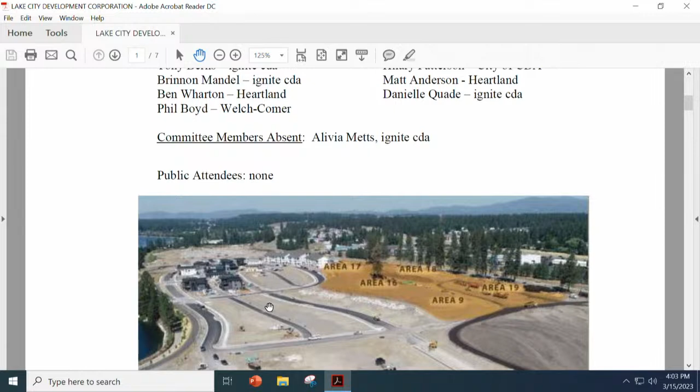So this team met to chat about these areas, and they are depicted on the screen. This is an aerial shot of where areas 9, 16, 17, 18, and 19 are located. This also is a graphic looking straight down on those areas.

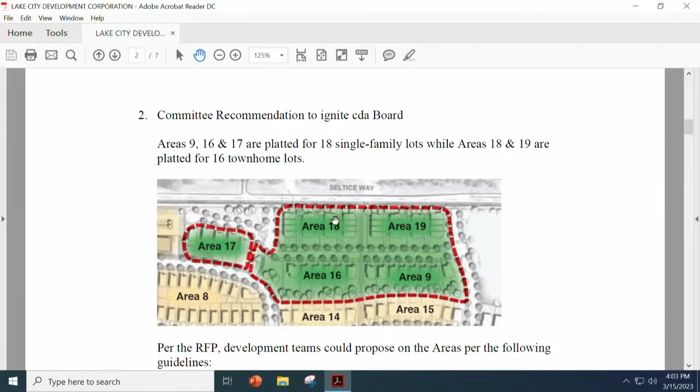Areas 9, 16, and 17 were designated for single-family detached residents, and for 18 and 19 we were looking for a preferred use of townhomes.

So just to give you a background on the proposal metrics, I'll read this: proposals must include all single-family areas 9, 16, and 17, or all townhome areas 18 and 19, or both types. Developers cannot propose on individual areas. Developers can propose alternate configurations or product types within the confines of the development standards, with higher density concepts preferred on areas 18 and 19. Any replatting would be required of the developer.

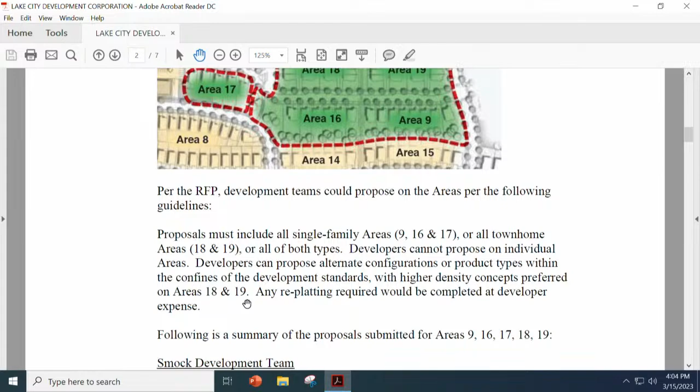So we had 3 proposals received. We had a proposal from the Smock development team. They bid on all areas contained in the RFP: areas 9, 16, and 17, they were looking at 18 single-family residents; areas 18 and 19, 10 twin homes. They bid on areas 9, 16, and 17 up to $2.7 million with escalation, and on areas 18 and 19 up to $1.9 million with escalation. Their base bid, though, was $3.37 million.

Toll Brothers also bid on all areas. They were going to put 16 single-family residents on areas 9, 16, and 17, and 40 townhomes on 18 and 19. Their base bid was $3.2 million.

We had a third development team submit, the Butler Stam development team. They bid only on areas 9 and 16 in the RFP. Their bid was $900,000 up to $1.4 million. This proposal was deemed non-compliant for the RFP requirements because they only bid on 2 of the areas and did not follow the requirements of the RFP, so the team did not consider this a compliant proposal.

We just want to show you a few of the graphics of the concept depictions that the Smock team provided, what their designs would look like. And we also received some representative concepts from the Toll Brothers development team, their townhomes, depicted there.

Using information from both the Smock and Toll Brothers development teams, mainly anticipated development timeframes, we ran a financial comparison to look at what these proposals offered the agency, including purchase price, additional Ignite CDA required site improvement costs, and estimated tax increment revenue projected over the life of the Atlas District. Credit to Phil Boyd and Welch Comer for this analysis. We looked at the product count they were going to provide and the phasing in time of completion in years, and weighed it into a financial analysis that looked at the tax increment yield over the life of the district.

We did this because of the issue in area 19 specifically, where there was quite a bit more density provided in the Toll proposal versus the Smock proposal, and we wanted to really look at a quantitative analysis of what that meant for the agency.

Looking at the different costs to the agency for additional earthwork, the analysis showed that the Toll proposal would yield the agency about $1.5 million more over time than the Smock proposal would. Given that, the team used a scoring matrix that we typically use to score these proposals, up to 200 points.

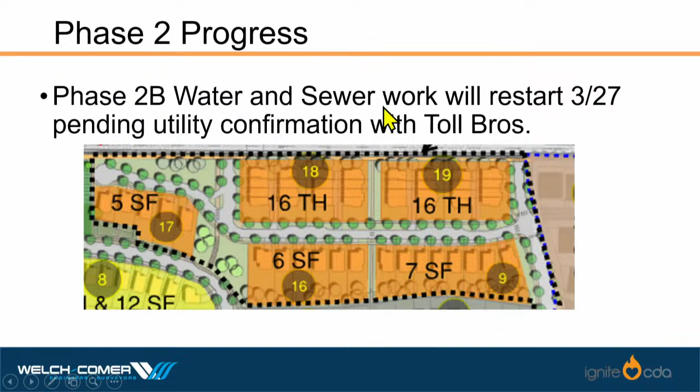Just some other progress work - if you were to go out there now, you'd see contractors working on a few things. One thing I haven't highlighted much is these little stormwater treatment systems, so I thought this was an opportunity to point it out. This is construction work at the end of Jammer Lane. These are called R tanks, and they have a special soil material on top called focal point. This is how it's shown in the plan.

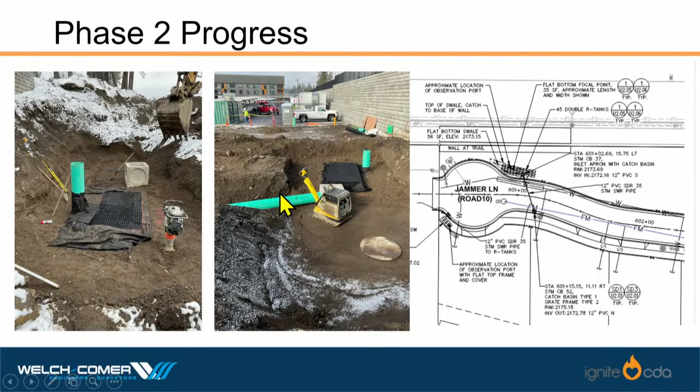The way they're constructed, you excavate a hole for these tanks. These R tanks essentially treat stormwater once it's moved through the soil, and allow you to more efficiently construct the surface component of stormwater management. What that means, if you're the master developer, is you have a certain amount of real estate. Traditionally in a lot of subdivisions, you'll see stormwater treatment on the side of the road in the form of wide swales - a depression with mowable grass where the stormwater goes.

When you have real estate that's relatively inexpensive compared to this land, which was very expensive - the city paid a very high price for it - when we did the financial feasibility study, we needed to figure out how to put a high enough density in there to generate revenue that would reimburse Ignite for its development costs, and the city potentially for their purchase costs. So to create that density, we needed all the land we could get.

Including where you would normally put stormwater treatment, we started pursuing this idea of using these R-tanks and focal point.

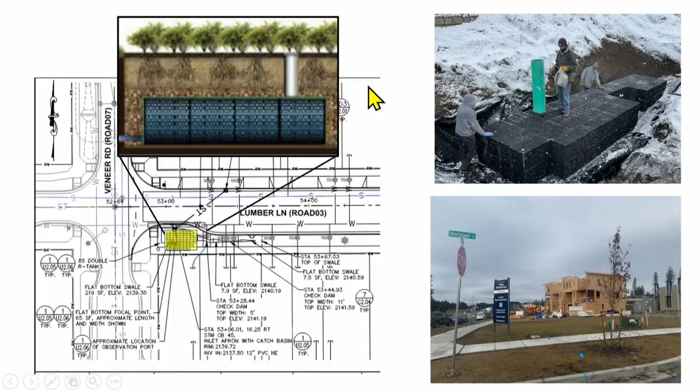As long as it doesn't have to be torn out in 10 years or something, it sounds like a good deal. What was the name of the tanks again? They're called R tanks. Just R tanks. Any other questions or comments?

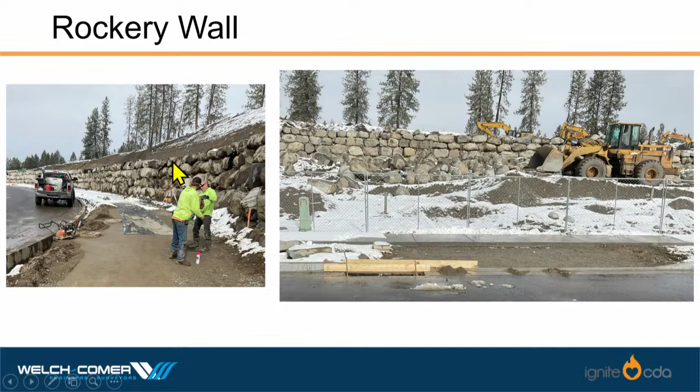Okay, just a couple other status reports. Our favorite rock wall is still underway, but should be finished by the end of the week. Coming along. Amen, it's just been a long haul to get it done.

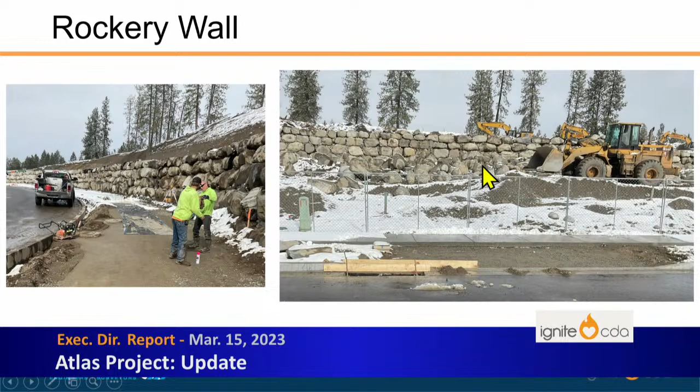If we really felt like we wanted it to be in the right-of-way, we could have gone to the city council and asked for an encroachment permit. I think it puts the city in a bit of a predicament when they allow perhaps Ignite to put a sign in the right-of-way for their development, but they might not let a private developer. So like Tony keeps telling us, we value good partnerships, and we wanted to be a good partner here, so we started evaluating another option.

Could we push it into Area 10? The sign is going to stay the same size, but some of the decorative fencing that was going on each side, we think we're going to pull off because it has a bit of a diminished value, I think.

I don't know that we're getting a ton of value out of the amount of money we might spend on it because it's very expensive, if the board remembers this fancy decorative signing. And so we've pulled it back.

We've established a temporary construction easement and a permanent access and maintenance easement. We've talked to the Area 10 folks, and they say they're willing to entertain it, send us the information. So this is just an update on the configuration of that. I know Commissioner English is always interested in the status of this, but there's quite a number of details to work through because there's a building sitting right there, and a bunch of utilities in front of it as well. So it's just a little bit of a challenge to get it wedged in there.

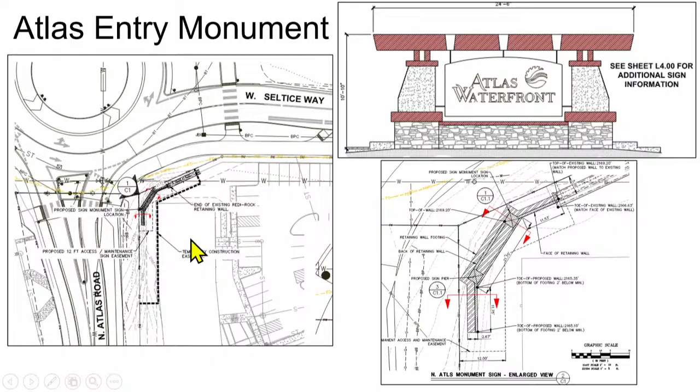Excellent. That's it. Hopefully that was short enough, unless there's any other questions. Perfect. Any questions for Phil? Okay, thank you. Thanks, Phil.

That's all I have, Mr. Chairman. Thanks, Tony. Next up is the approval of the updated employee personnel policy. Just to remind everybody, I think it was August or so when we were going through Tony's performance evaluation, we noticed that there were some inconsistencies with the way the policy was written and the things we wanted to do with his COLA increase that he's supposed to get.

And so Olivia and I sat down with Danielle and kind of went through it, and Danielle, I'll turn it over to you. Thank you, Mr. Chairman. So we, as Chairman Hoskins indicated, the chairman and vice chair Metz and I met, and we kind of walked through this policy. And then I also had one of our employment attorneys at the firm take a look at it.

We made very minimal changes, other than you'll see the changes in section 4 related to compensation. It had been the board's understanding and intent that the executive director's annual increase for cost of living would be tied to the city, but the way the language was in the policy, it didn't allow us to track with the city's COLA, especially in the inflationary times we are seeing right now.